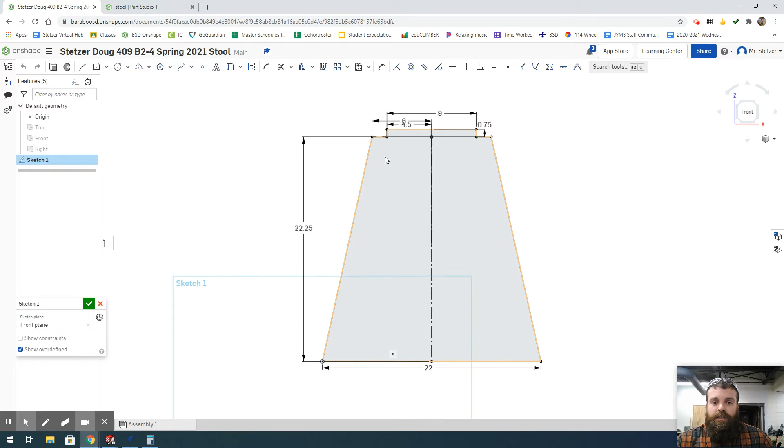Okay? In this sketch, if I reopen it, we can see that we've dimensioned everything. Everything's black. We have the little hat or rectangle at the top of our piece, or the top of our trapezoid. If you haven't clicked your green check mark yet, please make sure that you click your green check mark to save this.

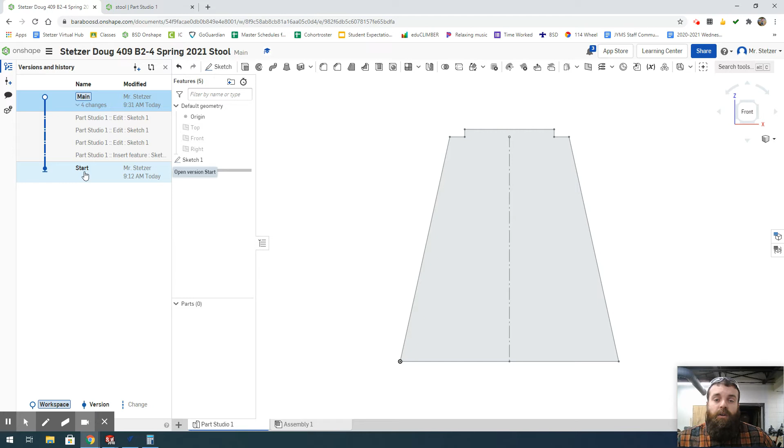Again, a history is created right here where we can see all the versions and all the changes that have been made. So if we ever need to go back or restore, copy, recreate, we can do this very easily. From here, what we're going to do is we're going to extrude this feature. Because we trimmed out between the rectangle and the trapezoid, this is one object.

All of these construction lines, these holes, it's like a giant jello mold. If I pour jello in here, it's going to fill that entire space. Okay? Nothing's leaking out because all of these corners, all these points are snapped together. They're connected no matter how far in or out we zoom, they're stuck together. So our jello isn't going to leak out.

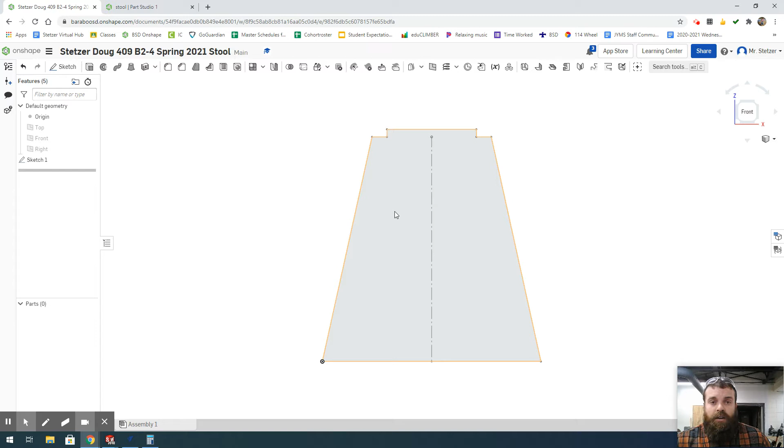I either want to select the sketch in the tree or select inside the sketch on our graphic area. You can see that the whole perimeter turns orange, and we can see those edges are orange so that it's selected. If I select it inside or if I select on the tree, that sketch is going to turn orange. What we need to do now is we need to extrude.

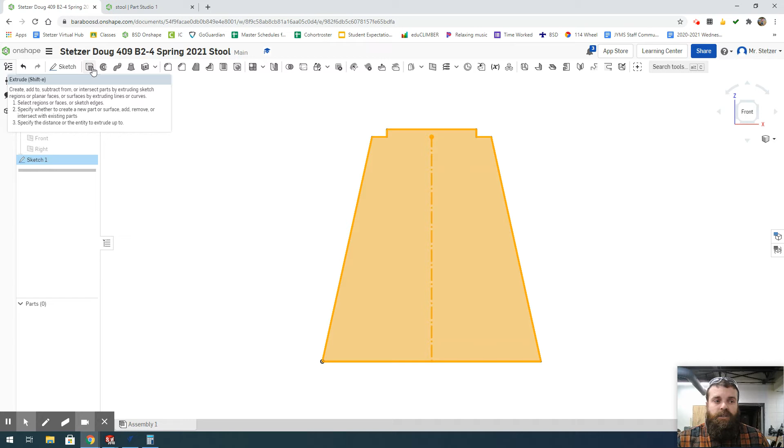Up on our ribbon, because we're out of the sketch tool, we move to the left one, shortcut key Shift E. I can hover over and see the specific instructions. It looks like two squares or two boxes next to each other. I'm going to click on this once. It's going to open up our extrude window. It should be right where you left your sketch window or sketch tab.

What we're going to do here is we're going to do a blind extrude. For our depth, we don't want this to be 1 inch. We want this to be the same thickness as our plywood. We're using 3/4. We may have to come back later and change this if our material has a different thickness. Not all materials are created equally. Some has higher quality, some doesn't. Cost is pretty consistent with the quality, higher cost.

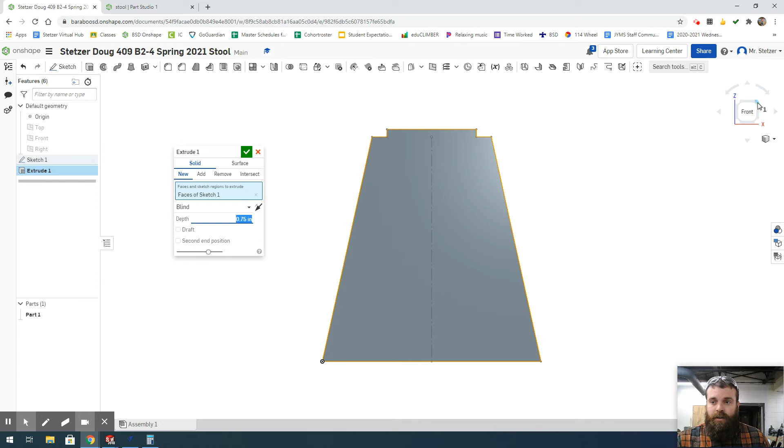What we're going to do is we're going to set this distance to 0.75 or 3/4 of an inch. Once we have that distance set, I can hit enter. It's going to give us a preview. If I set this to a corner, come over to my view orientation cube, click on the top right corner. You could also go to camera render options and select trimetric to get the same view.

From here I can see that this became 3-dimensional. I could change this to symmetrical so that it's growing equally in both directions, but blind should work fine for this project. I'm going to click my green check mark, and now I've created that first 3-dimensional shape.

In this video, I'm also going to show you how to fillet some of these edges, so I'm going to turn this back to a front view. Actually, we'll leave it off at the front view in this 3D view. Up on our ribbon, I'm going to select fillet, this square with a rounded corner, shortcut key Shift F. I'm going to set this distance.

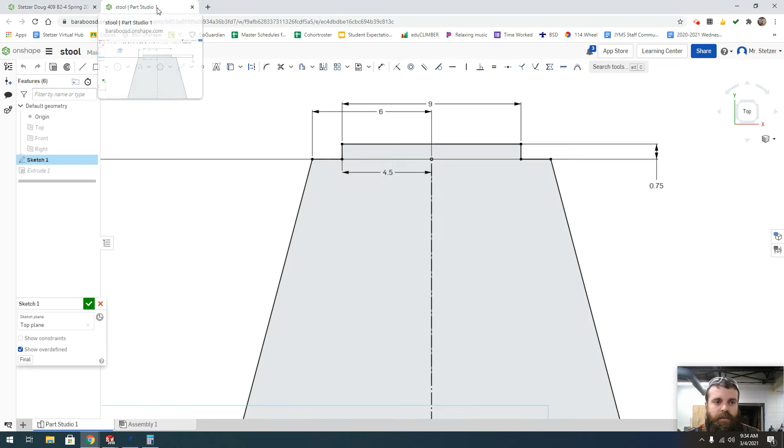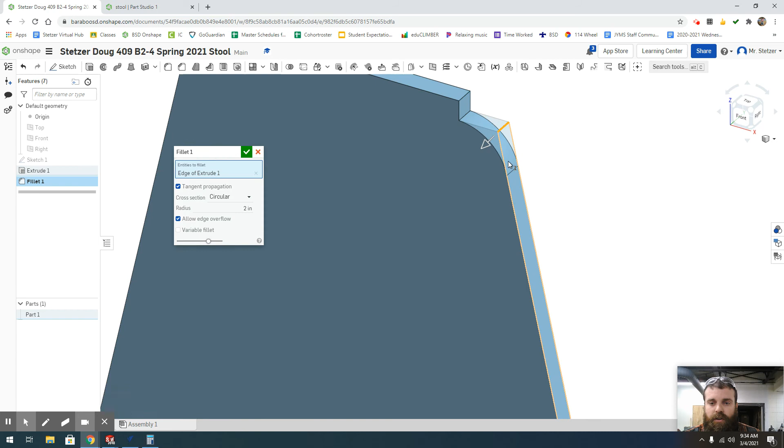If I come back to my model that I created earlier, I don't have that in there yet, but from my previous models, I know that we have a 2-inch radius. So I'm going to change this radius from 0.2 to 2. I'm going to select these corners, and these corners should then fillet to 2 inches. So you can see that it gives us a preview, and it gives that a nice curvature so that it's not such a harsh corner or edge.

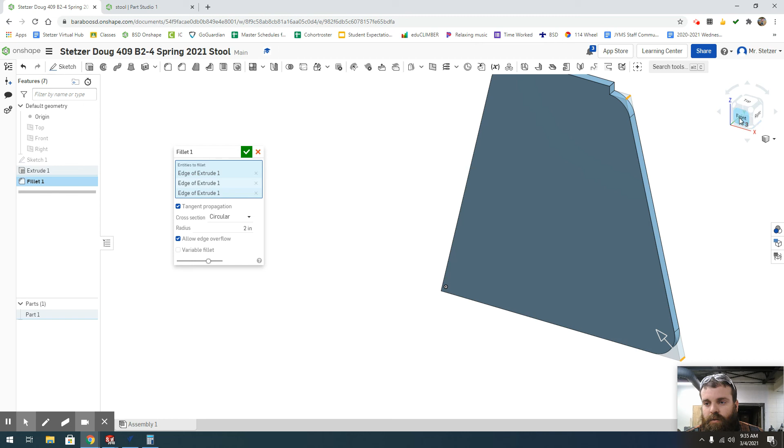I'm going to do that to every corner on the trapezoid, not on this rectangle, just those trapezoid edges. This corner or edge we can't see right now, so we will need to turn this. We could go to the front and then just select the lower left corner. You could also select these other points, arrows, to make some curves or curvature as desired.

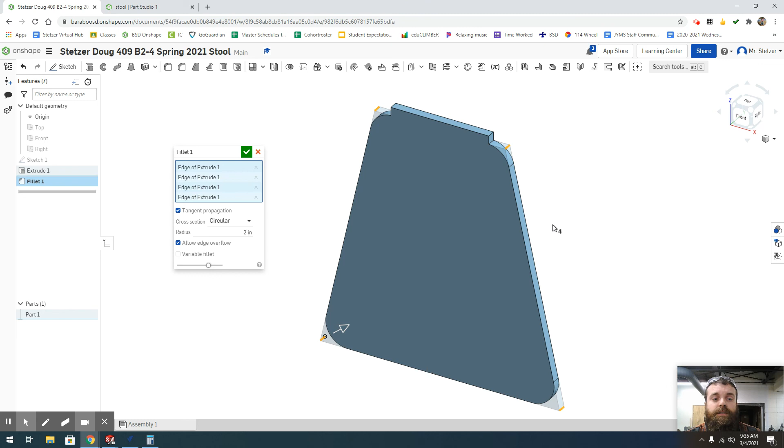I'm going to move back to my trimetric view, and I can see my preview of how this is going to kind of round off those shapes. Next, I'm going to select my green check mark to save, and now we have some rounded off corners.